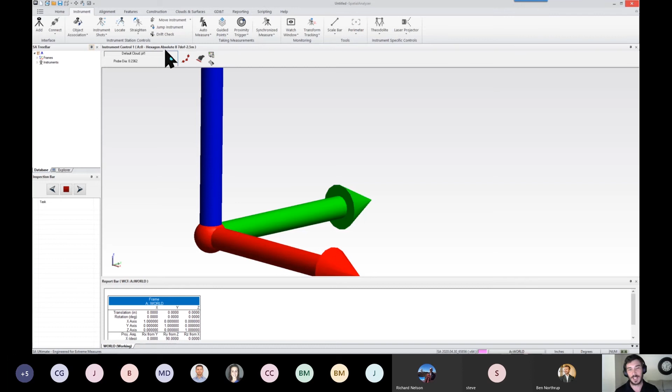But with that being said, we're going to jump right into alignments. I just want to show you a few alignments that are built into SA. SA is a portable metrology software, and we always have been portable from the very beginning. One of the strengths of our software is the ability and versatility of the alignments possible in the software.

So there's a whole bunch of different alignments that you can choose. Just to see a few of them, you can right click on your tracker, and you can see these are kind of the top dozen alignments or so that people use on a day-to-day basis. You can also see some of the more frequently used ones here in the alignments tab.

But I just want to go through a few of the really, really simple ones and just show those to you. And then we'll get into a few more complex ones as we go along. And I promise you that by 1:30, we'll be wrapping it up too.

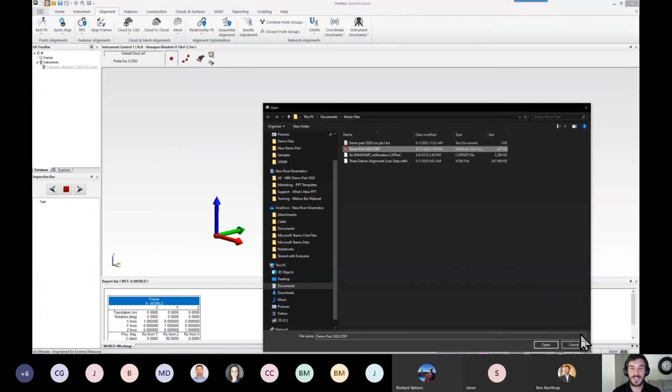Okay. So the first thing I want to do is an alignment called a quick align. And a quick align is a very simple and straightforward alignment. So I'm just going to take my CAD model here, and I'm going to add it to SA. All right, so this is a demo part that we just recently designed and started using here. And so it's a relatively flat part, and it's got some features on there as well.

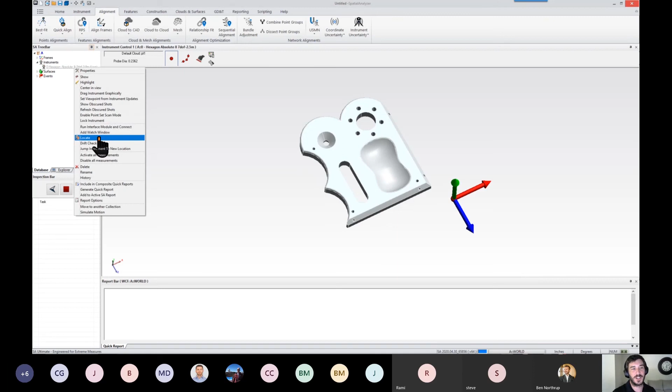And so in order to perform a quick align, it's very simple. You just want to select quick align up here, or you can right click on your instrument and select locate quick align. So any way that you get to it, you still get the same dialogue, and it's really easy to get to. Now, a quick align generally works best with a 3-2-1 type of alignment.

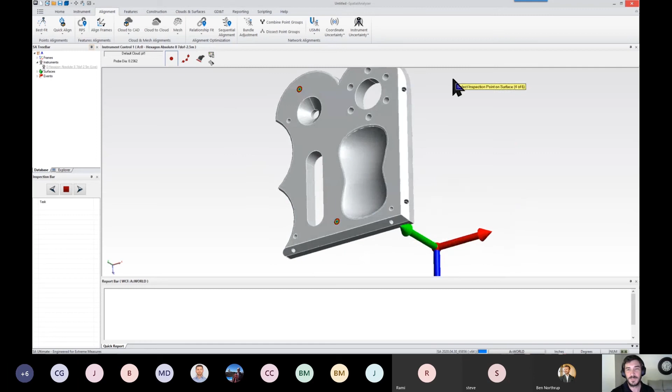So I'm going to pick 6 points, but I'm going to be sure to be a good metrologist here. And I'm going to select those points on a plane, line, and point. So I'm going to use this big top surface as my plane. I'm going to use this edge over here as my line, and I'm going to use this edge right here as my point. So now that I've got 6 points, I'm going to hit enter, and it's ready for me to go ahead and start measuring.

Now, if you had already inspected your part and you included these 6 points as a part of your measurement, you could actually just pick those 6 points in sequential order and it would align for you. I've got an instrument right here, so you'll see me leave the camera. I'm just going to go over to my part and start measuring those points right now. So I've got my part fixtured to a table here, and I know you can't see me, but just trust me that what you see on the screen there replicates exactly what I'm seeing over here.

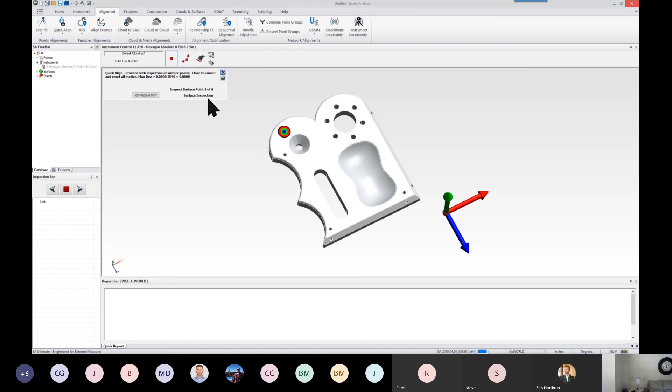And I'm just going to select the point on my surface and go ahead and hit measure. And you can see as I measure, the screen updates to show those targets with the next available point. That's 2, 3, and then we'll move over here to the side, 4, 5, and 6. Now, what you want to look for when you've completed your 6-point quick align is that your RMS and your max deviation should be 0.

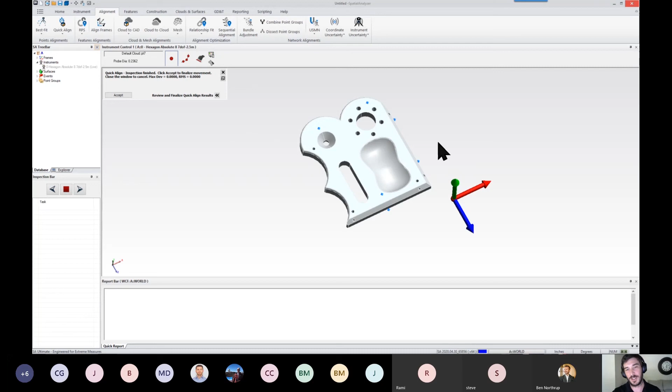If you think about it mathematically, statistically, a 6-point 3-2-1 alignment is a perfect alignment. So if you see anything other than zeros there, then that's probably a red flag. You want to just go ahead and repeat your quick align. I like that look there, so I'm just going to hit accept. And then just to prove that I am aligned to my part, it's really easy to bring up a DRO, or what we call a watch window in Spatial Analyzer.

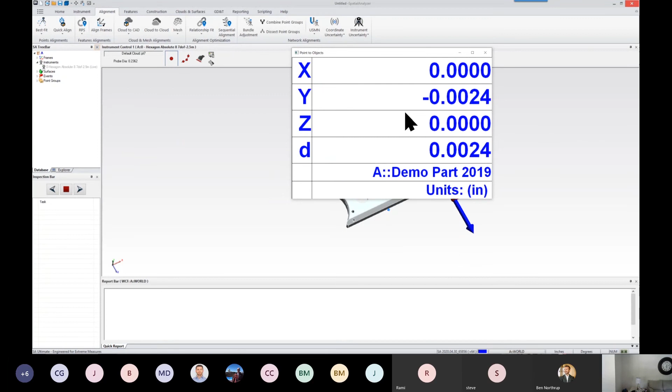And so I'm just going to bring up a watch window on this entire part. So I'm going to hit add watch window. And now you can see the current location of the arm as I go back over here to the part. And then as I move around the surface, you'll see that my watch window updates in real time with my alignment. And let me just move that window a little bit so you can see the gray arrows there that are updating with the direction of any deviation that's found.

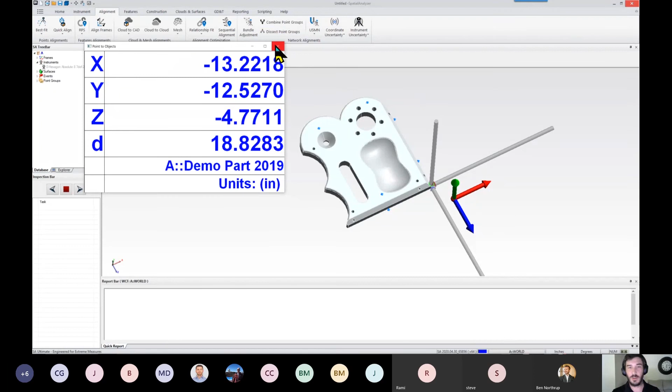So a quick align is just a super fast and simple way to get into your part coordinates. And it's also really straightforward. But just to give you a little bit more information, you've got to think about, when you're performing a quick align, how sensitive your alignment is to any one of these points being wrong. So if I were to have taken this 6th point on the surface where there was an error, that 6th point is the only point that I'm using in order to orient my part in the Z direction.

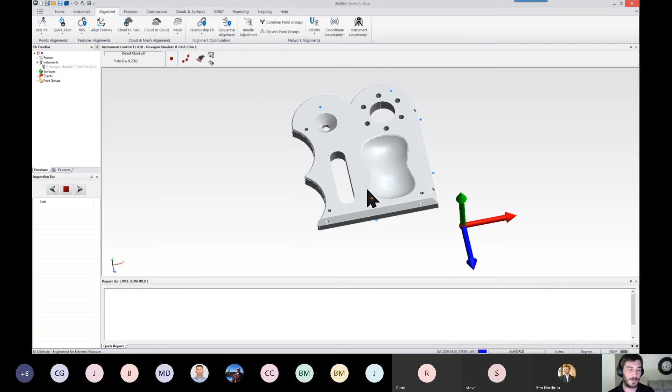So any error in that point or in the surface of the part right there is going to translate directly into Z error. So that's why it may be beneficial to you as you perform your quick align to, instead of just selecting 6 points, select additional points as well, and you can do that while you do it.

All right, I'm going to go ahead and move on to the next type of alignment, which I'll cover is called a cloud to CAD alignment. So I want to show you what that looks like really quick, and we will do this with a new instrument. So I'm going to move my part, and anytime you translate or move part or instrument in Spatial Analyzer, you want to make sure to add it as a new instrument in your job file. So I'm just going to select jump instrument to new location.

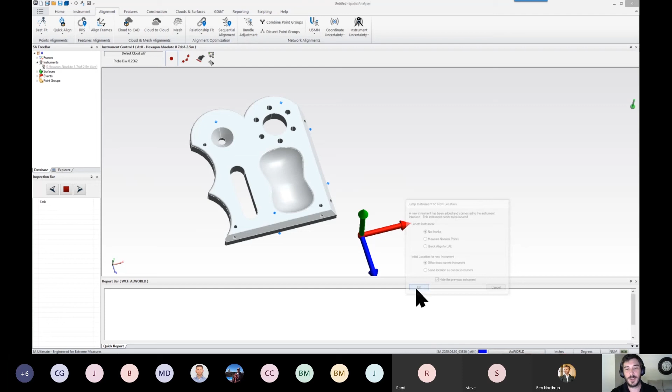If I wanted to locate that instrument, I could at this time by using these 2 particular types. That's not one of the ones that I'm using, so I'm just going to hit OK there. And then I'm going to go to my part, and I'm going to begin. Let me select one more thing here for clouds and surfaces. I'm going to prepare a clipping plane. Okay, so we've got our clipping plane. We'll go to next. There we go. So it's going to automatically hide that clipping plane and generate a new cloud called default cloud.

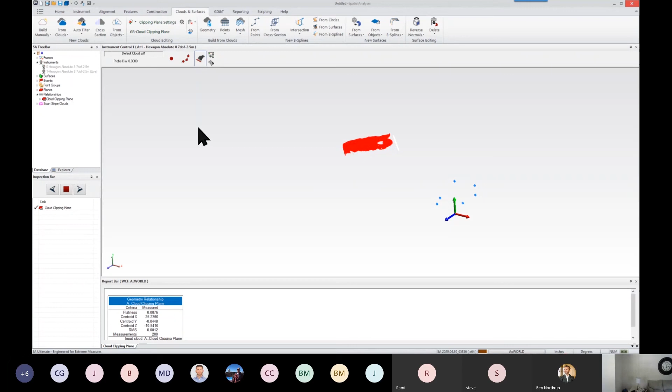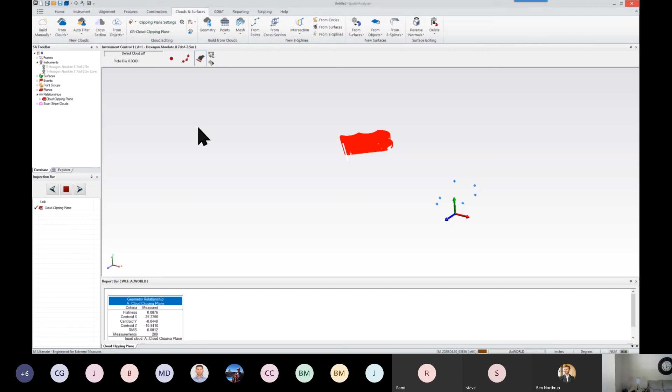So we'll just begin scanning, and you'll see the part start to develop here really quick. It's going to get some scan data on the edges. And it's critical when you're doing a cloud to CAD alignment that you get a good coverage on the part. You don't have to get 100% super dense data, but you do want to get good coverage on the part so that way it can perform a really decent alignment to your CAD model. Let's get a little bit more on the edge there. And there. Okay.

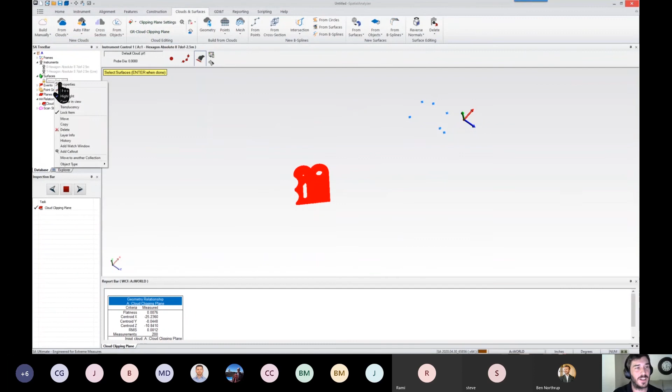So now I've got my scan going, and you can see that we got a really decent scan of our part there. So all I've got to do is just right click on the cloud and select Align to CAD. It's going to ask me to pick my surfaces, which I've hidden. So let me go ahead and show that again. And I'll just pick that surface and hit enter.

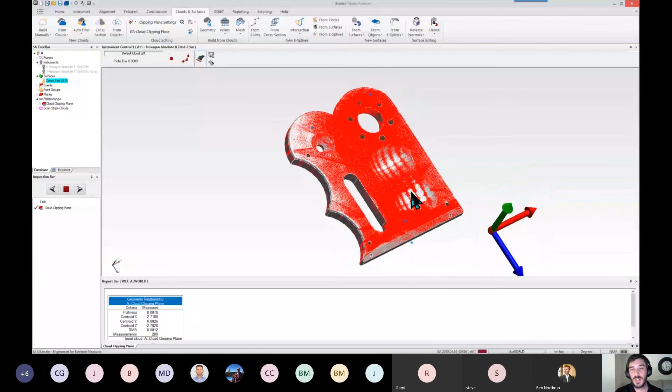So very fast, SA is going to mesh the surface, perform the alignment, and also give you the residuals for that alignment as well, the translation and the rotation and everything. So now I've got a great alignment in my cloud to CAD, and I didn't have to do anything more than that. So that's a really, really simple way to align. It's really fast as well.

Okay, let's continue on in this particular job file, and let's talk about another type of alignment that's called best fit. Now, if you've done any type of fitting in SA, you're probably familiar with best fit. That's probably the most popular way of fitting into a set of reference targets or into a tool or something like that. Let me hide these points, and what I'm going to do is I'm going to bring in my reference data. And what I'm trying to approximate here is if you have a tool where maybe you've got some tooling balls, and I'm imagining these points here are like 1/4 inch pin nests or 1/4 inch holes, and then we're just going to select a tooling ball above them.

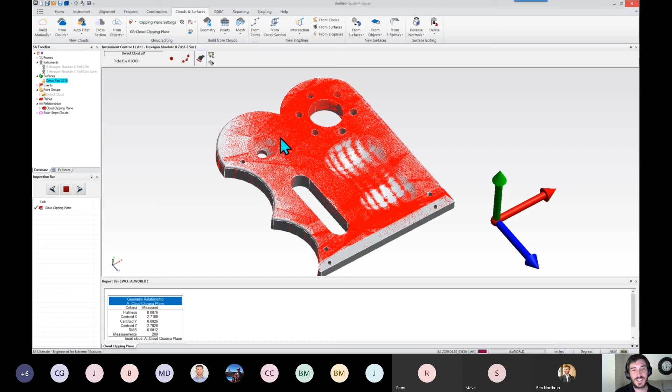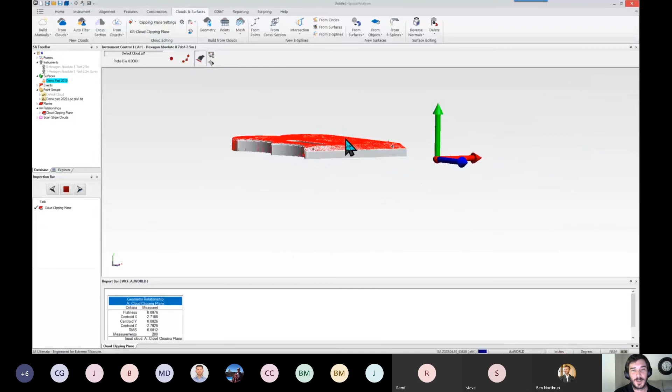So what I have is a set of reference data that I want to bring in on top of my part. Now, SA supports really good model-based definition, so you can have these all saved together, but I just happen to have them in a separate file here so that we can bring them in separately. So I don't know if you can see that, but we've got some point data that's right above those holes. So what I'm going to do is I'm going to go ahead and measure those, and then I'm going to perform a best fit to those reference points.

So I'll just call this my TBs. Shout out to the tooling people that are measuring tooling balls, and I'll just start with 1. Okay, so now with that set, I'm going to go back over to the part, and I'm going to begin to measure these as probed points.

So any questions so far on the quick align or cloud to CAD alignment? Okay, I think I'm ready to start measuring here.

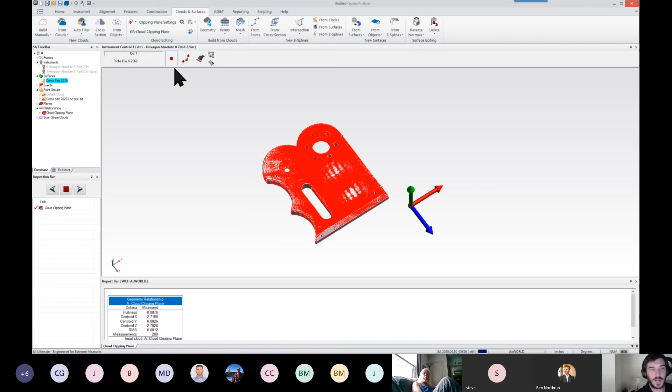So let me go ahead and, what I need to do is add another instrument because we're actually at a new location now. I'm gonna jump instrument to new location. I'm not gonna do anything there, and we'll hide that. Okay, now we're at our new location. We're on our tooling ball point group, and we're ready to measure. So I'm just gonna measure each one of those 7 holes.

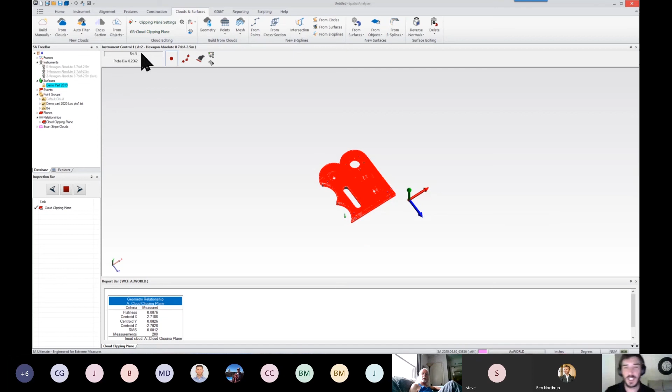Now, it's not performing any real-time alignment here because I haven't actually told it to align. I've just measured the data that I'm going to use for my alignment. So you can see my part is over here now, but my measured holes are over here. Now, if you haven't updated SA in a little while, you may be surprised to find that you don't have to have your points labeled the same anymore for a best fit. We can actually figure that all out for you.

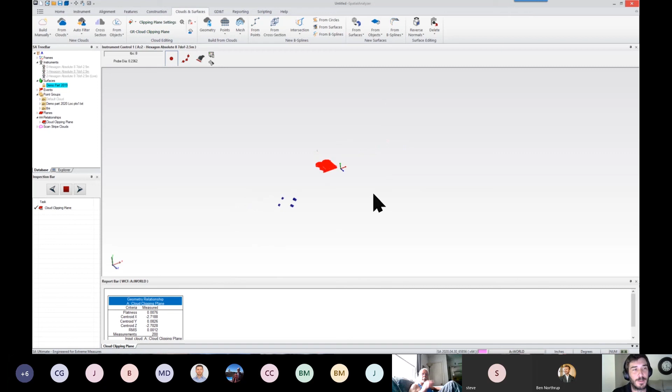So you can see I measured my points in a certain order. I didn't use the same nomenclature, not PT1 or anything like that. But when I go to perform my best fit, which I'll go to alignment, I'll select best fit, and we'll do points to points. It's going to ask for the reference group, which is that group of points that I just imported, that text group. And it's going to ask for the corresponding group or actuals. I'm going to double click on there.

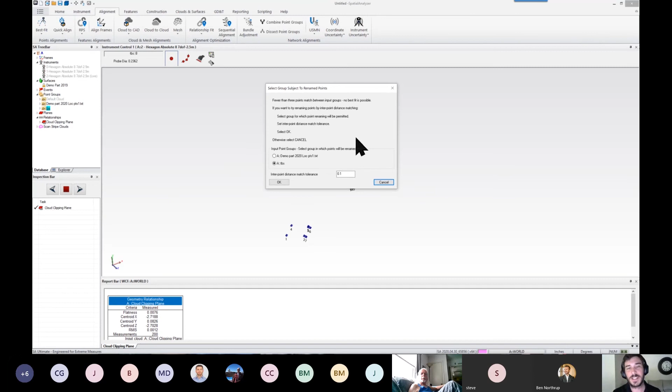Now, this is a new feature that came out last year, and I think our last release of last year. And what this says is it's basically saying, hey, you asked me to perform a best fit, but I don't actually have any points that are named similarly. So which of these do you actually want to rename? I'm going to leave my nominal data the same, and I'm just going to rename my tooling ball points. So what it's going to do is look for interpoint distance matches.

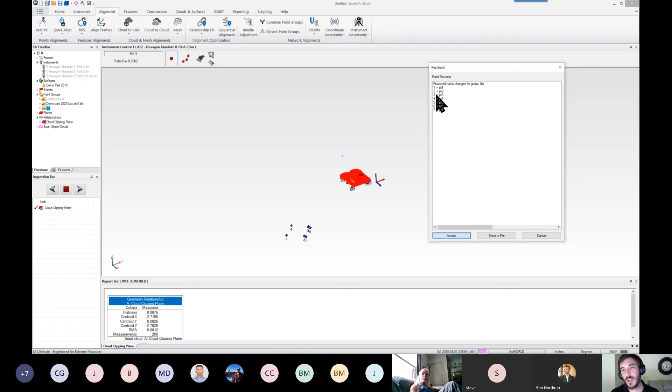So I'm going to hit OK there, and you can see that it's chosen a rename of these points. And I did actually measure them in that order, but that's not actually critical. So I measured them in the correct order, but I didn't name them correctly. So 1 goes to 1, 2 goes to 2, etc. So I'll just hit accept, and you'll see these point names will update really quickly as well. And then we get our best fit dialog.

So now I've got my point names correctly, and I can refresh on my best fit. And this is actually a really great fit here. I'm less than 2 thou. And just so you know, the part that I'm aligning to is actually a 3D printed part. So I don't expect machine tolerances on this. So I'm really happy with these.

But in the best fit dialog, if you do have anything that you would like to adjust, then you can just deselect points. So this would be my worst point here at 2.5 thou. I can hit refresh and then just fit with just the other 6 points. So however you want to do it, that's all possible in there.

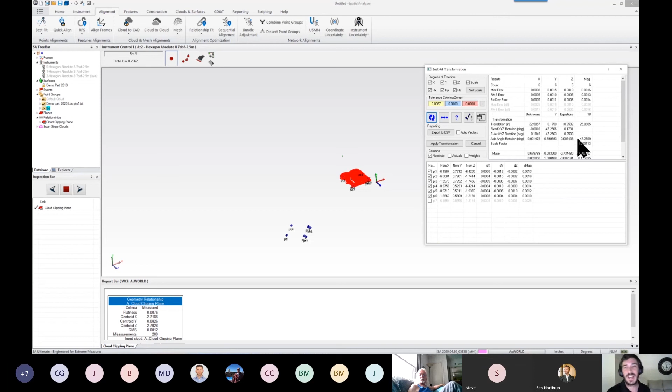And then another thing that you can do is scale, and you can adjust scale. So if I adjust my scale, I just want to warn you to take a look at your scale factor and make sure that it's something that makes sense. So for a 3D printed plastic part, that's probably accurate to the amount of change. It's a little bit warmer in here this afternoon than when I originally measured these location points. So we'll just leave that like that, and we'll go ahead and hit apply transformation.

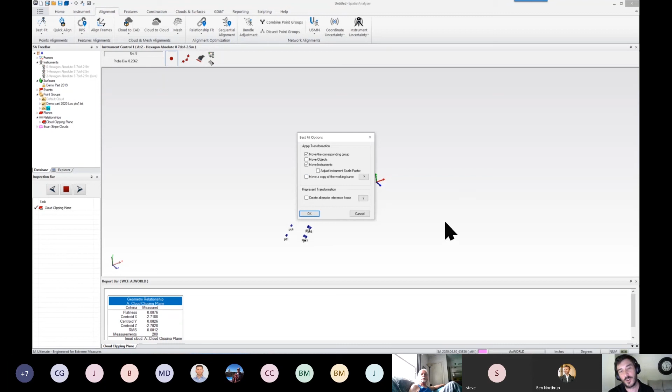So what it does is when you've done the best fit, we want to move our instrument as well. And if you want to have a reference for where you were before this, in this case, my current location is not really anything that I need to make a record of. But if you did need to make a record of your current position before you moved to this new position, then you could make a copy of the working frame. I'm just going to hit OK.

It's asking me which instrument I want to transform. So I'll select that and hit enter. And now I am aligned to my part, and I won't go through the watch window to prove that, but you can see now our point names match up and their locations match up as well.

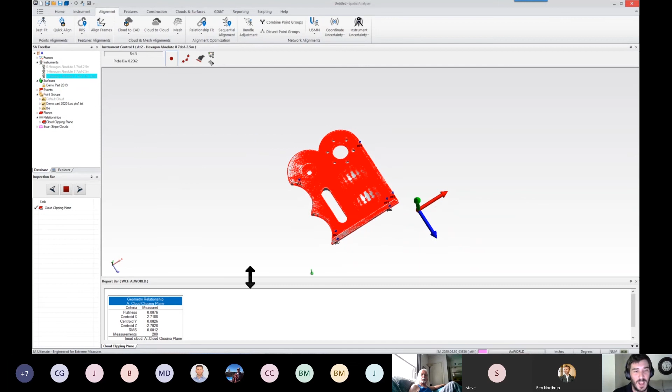Another thing that is important in this situation is that whenever we do an alignment, we want to make that traceable. So if you do have to report out your alignments and your residuals from your alignments, you can always go to your events category and you can select your best fit transformation or whichever instrument transformation alignment that you choose. And that data can be added right into your report. So if I go back and I look at this, I can see which points I used for my alignment and what the deviation was for those points from their nominals. So that's really great information as well.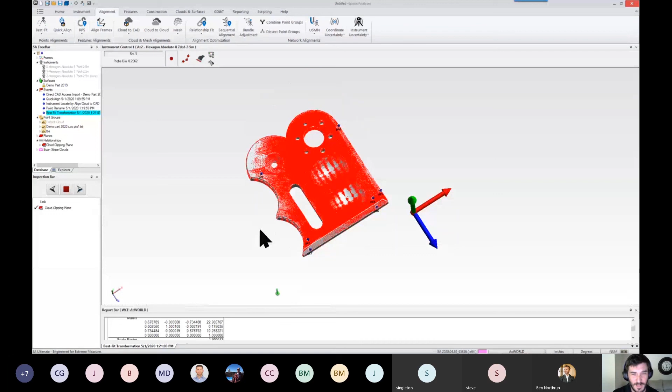Okay, and then the last one of these simple alignment types is doing a measure nominal points. And really, this is mathematically virtually the same thing as performing a best fit. It's just a dialog that helps walk you through the process of measuring so that you don't miss anything or so that you don't have to worry about naming stuff correctly. So again, best fit kind of takes care of that now, but this is also pretty helpful.

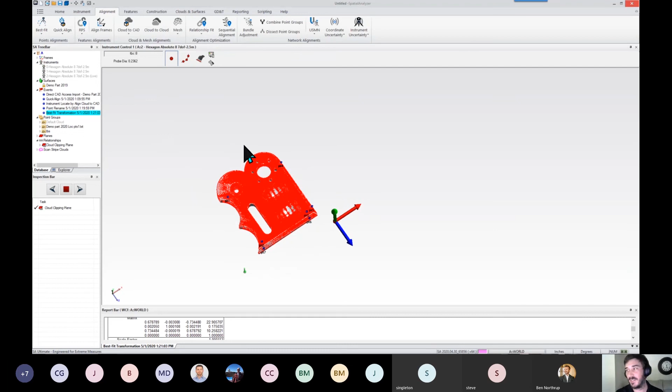So I'm just going to go ahead and one more time jump instrument to new location. And this time I am going to select one of the quick select ones for measure nominal points. So I'm going to check that, hit OK, get this measurement out of our way. And it's going to ask me to select my nominals. I'll go ahead and pick that text point group. And then I'll look here for the list of points that I need to measure.

So one of the handy things about this dialog is after measuring the first 3 points, it can actually automatically rename the points no matter what order you measure them in. So it's just going to kind of walk you through the process of measuring. If you're unfamiliar with the particular job file that you stumbled into, and you may not be aware of where all the points are, this gives you a kind of a list to check off. So I'm going to go ahead and go to point 1. I'm just going to grab my arm, and I'm going to start measuring.

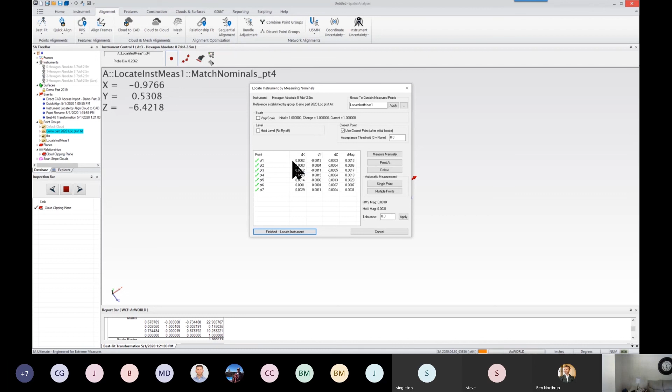And as soon as I measure the first 3, you'll see those deviations pop up. And then I can measure the remaining points in any particular order that I want. So I did 5, or what was that, 6, 7, 5, 4. And if at any point you don't like one of those measurements, so let's see, point 7 is our worst point there, you can just go right back to that point and hit remeasure.

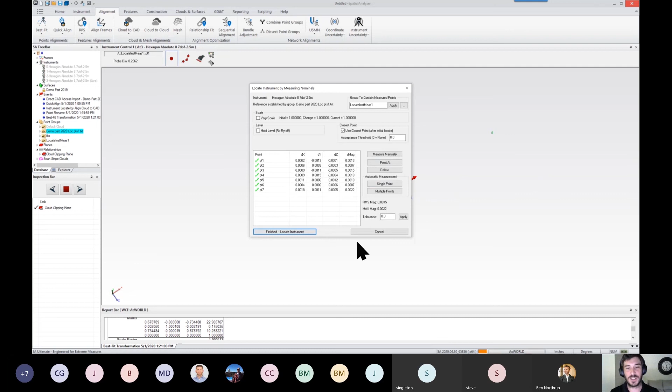And you can remeasure it as many times as you like. And it'll just overwrite the previous point until you get to something that you like. So that improved a little bit with the next measurement. So I like that. I'm just going to go ahead and hit finish, instrument locate. So those are quick align, best fit, cloud to CAD, and measure nominal. Those are really simple and very fast alignments to use.

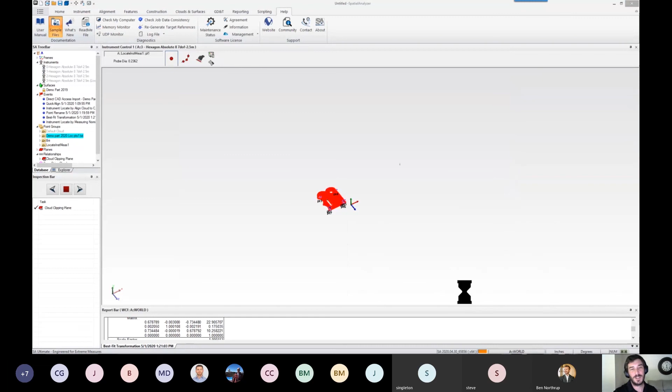The next section that I want to talk about for just a couple minutes here is alignments that are a little bit more complex. And in order to do that, I'm going to open a sample file, which everyone should have built into every installation of SA. You always get these sample files. This one is particularly called MP analysis demo. We're not going to be using any measurement plans, but we do want the job file that's available in here.

So a relationship fit is a more advanced form of alignment. It's where you would take a set of points and compare them to a nominal or a CAD surface, and then you would allow SA to move the instrument or the object until the deviations between those points and that surface are optimized.

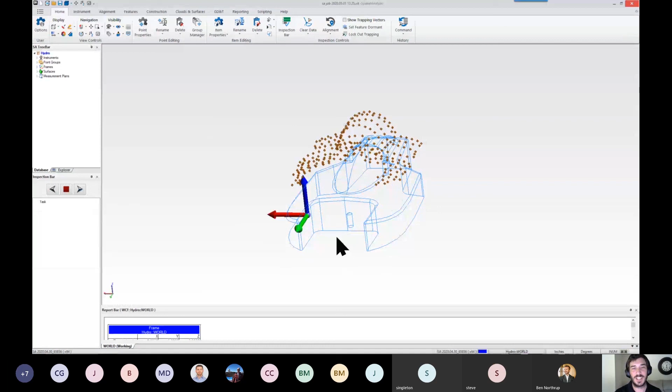So the first thing that I want to do here is create a type of relationship that we haven't talked about today, called groups to objects. That's under the Features menu, under the Points category. I'll just pick that group and hit enter, and pick my object and hit enter. And I can render that solid if it helps you to see that a little bit better.

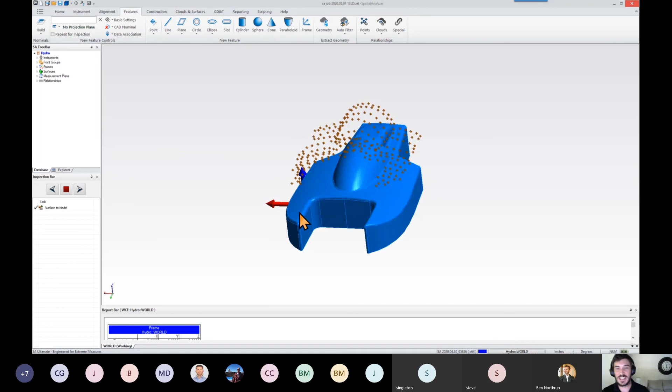But now you can see where our points are completely off the surface, and we need to optimize those point locations. To make this a little more obvious, I'm going to turn on a vector group between those points and their correlating location on the surface. So we've got some really big deviations, obviously, because we're not aligned.

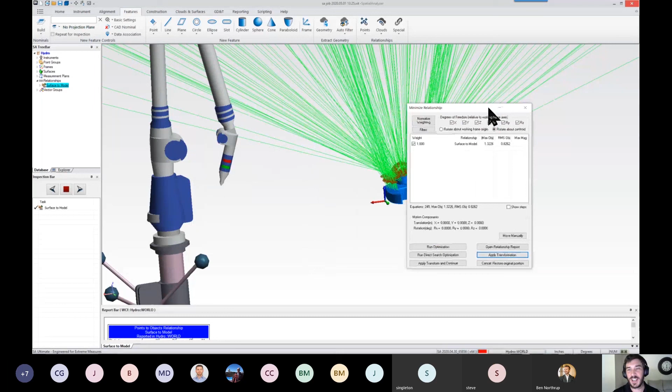But now we can locate our instrument, coming back to the most frequently used types of alignments, and we can use something called minimize relationships. So I'll go ahead and pick that. You can see right now we're sitting at about 1.3 inches off the surface. This particular job file just allows us to show one relationship and how, when we optimize it, we get much better surface deviations from our part.

One of the things you'll get from this dialog is you can restrict the degrees of freedom that you allow your instrument to move. For instance, if you're working with an instrument with a very accurate internal level, you may want to exclude RX and RY so that it won't rotate about the gravitational vector. But if you don't need to do that, you can just hit one relationship, run optimization, and you're good.

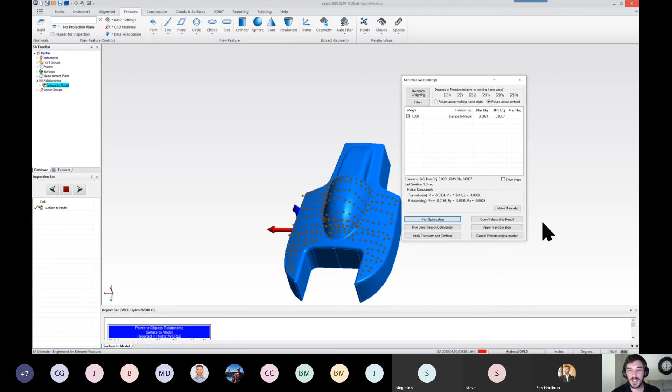Run direct search optimization is a more advanced way of solving these same mathematical equations. If you'd like more information about that, our advanced class talks about how that works, or send me a message afterwards and we can talk about it. So I'll hit apply transformation, and we've done a relatively good alignment there.

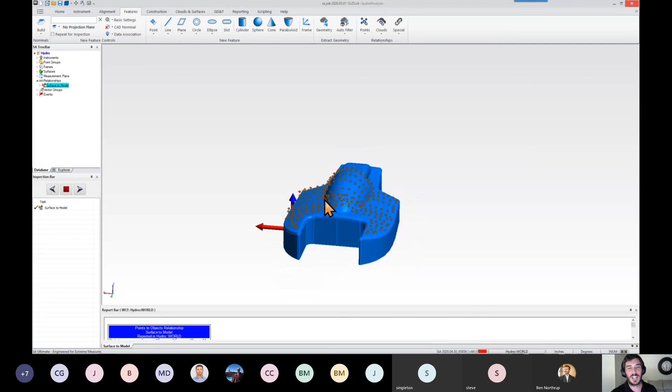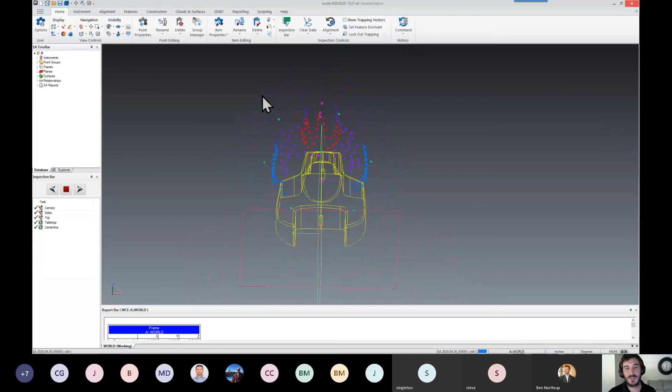The next one I want to show you is when you have multiple relationships and how SA can simultaneously resolve them. I'm going to pick the relationships job file, also in sample files. We have the same part here, but a slightly different arrangement of these points. Now instead of one point group, we have multiple point groups and multiple relationships.

So if we go back to that locate dialog, minimize relationships, now instead of optimizing a single relationship, we can optimize all of these relationships. You'll notice some of them have more points than others. To get good results, we want to normalize the weighting, which takes out any factors from some relationships having more points than others. So I'll do that, and then we'll run optimization.

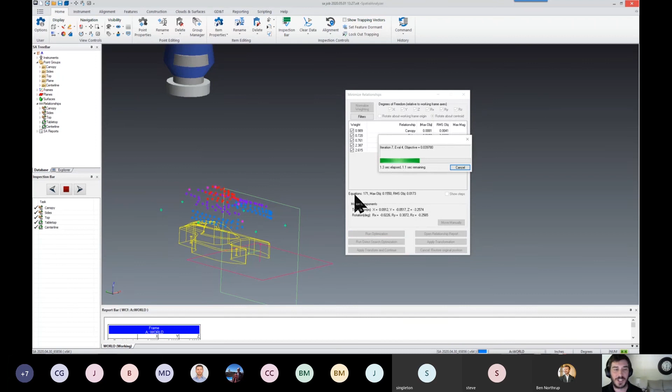It's kind of difficult to see, but we have two points on this relationship called center line. If I turn on hover mode and hover over center line, you can see it's this plane here, and there's a couple of points that are off, with a pretty big deviation. I happen to know one of those points is an outlier, so I don't want to include it in my solution. I'll right-click on the relationship and select outlier rejection.

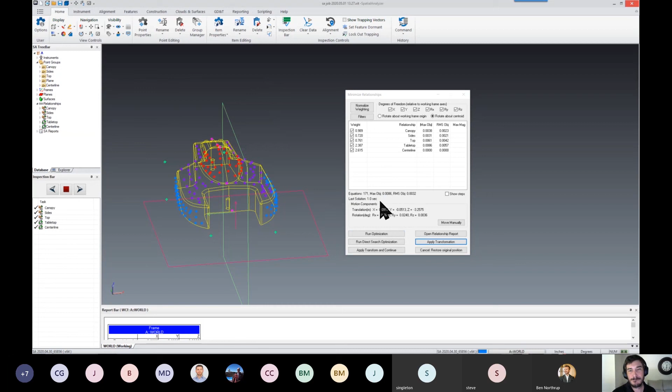Because I know I should expect these points to be relatively close, I'm going to reject all points that are more than 10 thou out on the deviation, hit OK, and run this optimization again. Now with that point disabled, we get a really great result on center line, because we only have, I think, one point on there now, and we're rejecting that outlier. It also allows the other relationships to fit slightly better.

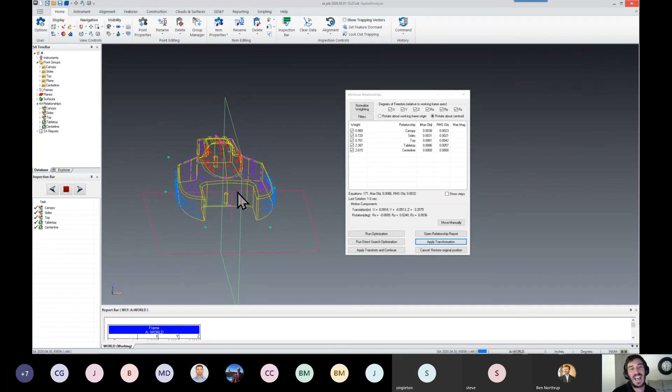So one thing that's a little bit more advanced, but we won't cover today, is something called fit constraints. Fit constraints are a way of saying, if I have a relationship that I know needs to be within 20 or 30 thou of, say, surface profile, then I can add that as a fit constraint. As soon as the solution gets to within plus or minus 30, what it will do is stop trying to get that any closer to zero.

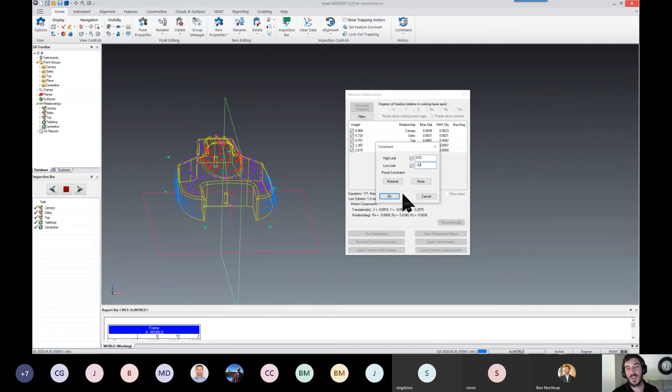So really it creates a dead zone where your points will no longer affect your solution if they're within their tolerance. That's a very powerful feature of Spatial Analyzer, to take a part that should be failing, but because you use up most of your tolerance in other relationships, you can actually get those more critical relationships to pass.

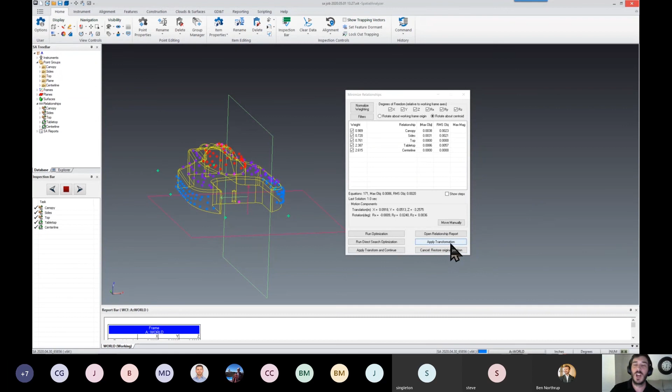All right, so I know we're at 1:30 and we should be closing up here. I want to show you one more example file about another type of fit that you may not think of as an alignment technique. Let me just open this one more file here really quick. And while I'm looking for it, does anybody have any questions about any of those simple alignments or the more complex alignments? Let's see, I need to go to...

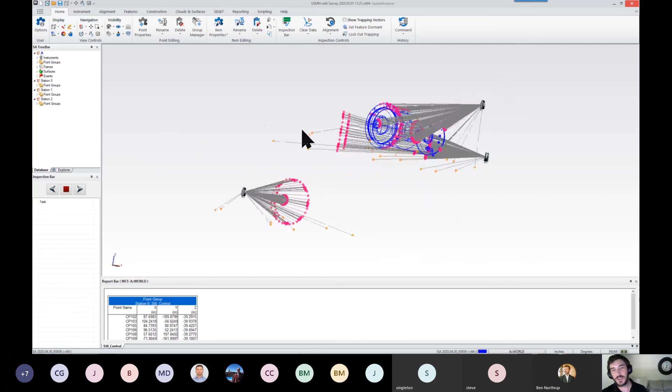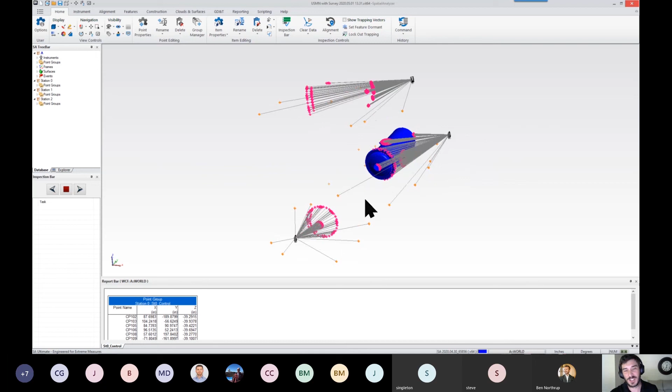Okay, so this is another survey here, which we just fabricated some data for, where we're surveying a part, but in order to get full coverage on that part, we really need multiple stations to perform the alignment. So what we've done is, in a time critical situation, instead of performing a best fit or a measure nominal on each instrument station, in order to make the best use of our time, we just went with each station and measured the reference network, the control network, and the survey data we needed all at the same time, and then just jumped to a new location.

So one of the things you may not think about as just an everyday type of alignment is our USMN feature in SA. USMN is a very accurate way to create an alignment network. I can use this to align these other two and actually get better fit results than I would with just best fitting them and doing sort of a leapfrog around the part.

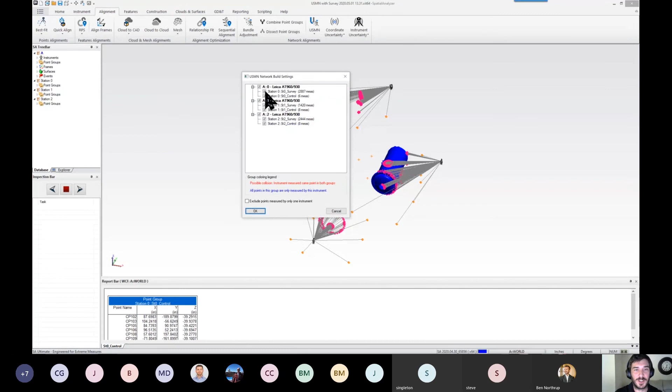So I'm going to select all my instruments for this USMN. I'm going to hit enter and hit OK. And then I need to not include a couple of my survey point groups. So I just want to uncheck my survey point groups because I'm not going to use those in my alignment, even though they will be moving with my instruments. We'll hit OK there. Now we've got our USMN.

And all we've got to do in order to get a really good and accurate best fit is just hit our best fit then solve button here. You'll notice that station 1 is not moving, so station 1 is going to remain in place and everything else is going to move to station 1. But when I perform that alignment, I can see I've got a little bit of an error here, 0.109. It's using up 123% of our uncertainty range.

So I'll just go ahead and trim that as an outlier one more time. It says it's going to trim 109, instrument 0. And then we'll go ahead and solve again. So as you begin to trim observations on points, your ranking updates.

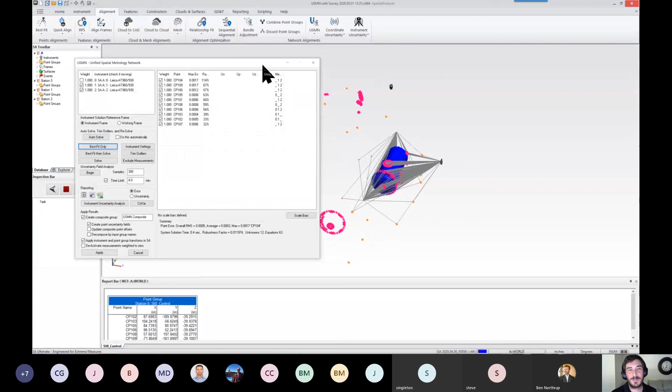And if you'd like to know more about USMN and how it works, we actually have a really good video on our YouTube channel, so I'd encourage you to take a look at that. But what we get with this is a very accurate placement of our instruments in the control network. And then all I've got to do is hit apply here, and all of my instruments, along with their survey data, snap right into place using that USMN.

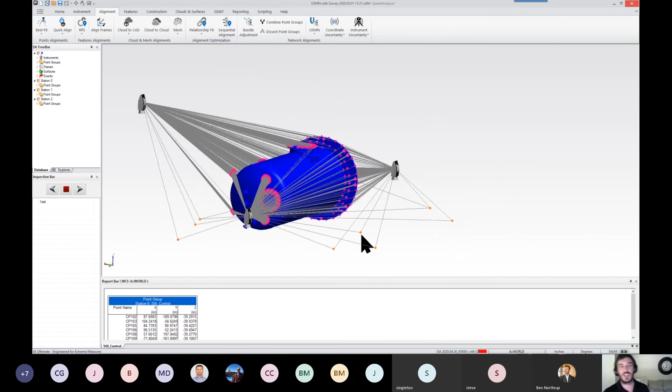Now, I didn't go ahead and create the composite group, but outside of alignments, if you're looking for a way to very accurately specify your control network, then USMN is really the only way to go, because it takes the best observations from each instrument station and finds the most likely location of each control point, not just averaging them out over all observations. So it's a really easy way to do it.

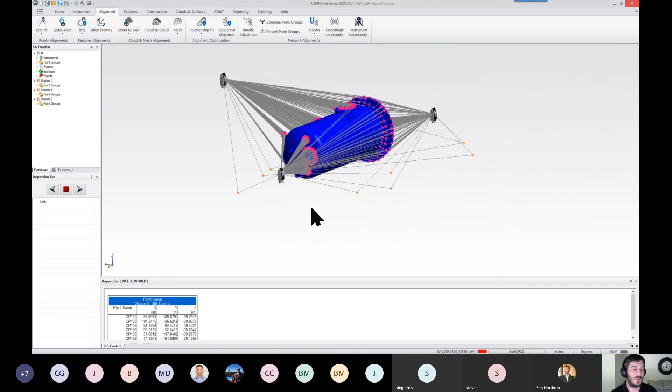There's a few more alignments we didn't get to, but if you'd like to know more about using a GD&T alignment, an RPS (reference point system), or sequential alignment, those are all built into Spatial Analyzer software as well. There's also more in there about fit constraints that would be really beneficial to you. But in the interest of keeping this webinar short and sweet today, that's all I've got.

Does anybody have any questions about anything we've covered so far? I know it was a lot of stuff. Looks like Jay had a question. Richard was answering it, but he was asking about locating an instrument through nominal points - do the first 3 points have to be done in order?

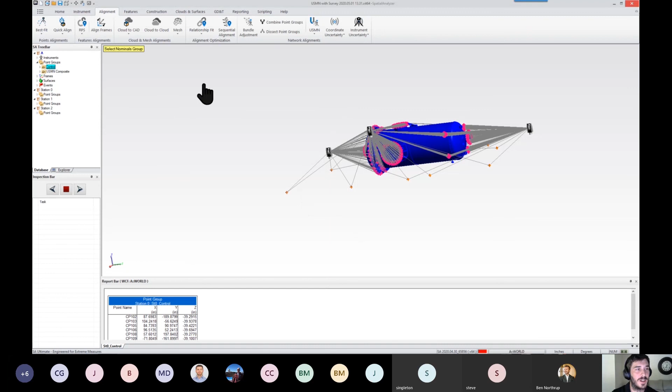Yeah, let me just go back and show that really quick as well, because that's a good question, Jay. If we select the instrument, go to locate, measure nominal, and use our reference point group here, you don't have to do points 0, 1, 2, and 3 in that order. You could select them in any order that you wanted to. But the key thing is you do have to tell Spatial Analyzer which point you're measuring at the time you measure it. So if you're working with a tracker, you'll want to put your SMR in the nest.

You'll want to select the nest that you're at, and then you can just hit measure manually. Or if you're using stable points with the tracker, you'll want to either measure them in order so the stable point goes from one to the next, or go back and forth on the computer so you can say, okay, now I'm measuring 8, now I'm measuring 1, now I'm measuring 7. As soon as you've completed that with 3 points, all the rest you can measure in any order, and SA will figure out what goes where. But the first 3 it does need in order to locate itself.

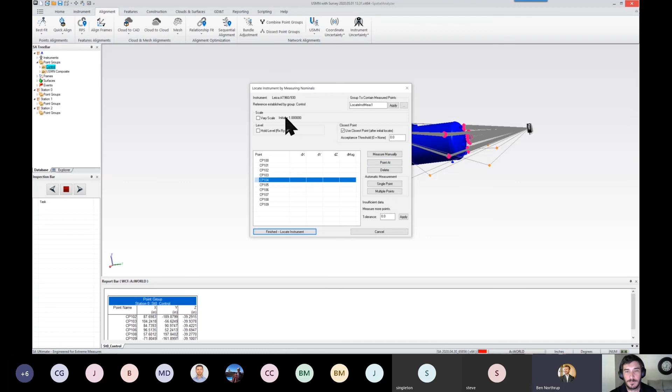That's all the questions that have been brought in. All right.